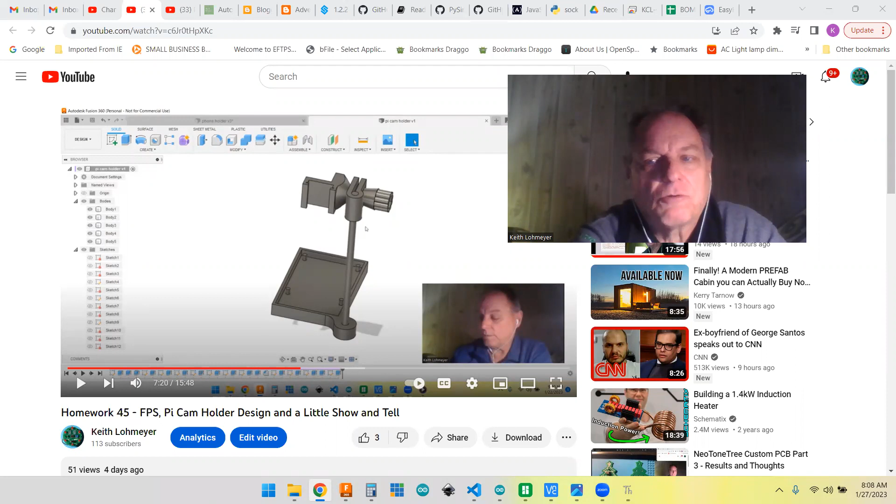Hi. While doing the homework for Paul McWhorter's Raspberry Pi class number 45, one of the homework things was, if we're also taking the Fusion 360 3D printing classes, to show off our design if we made one for the Pi cam holder. And I gave a quick look at what I did on my homework video about getting the Pi cam set up.

But one of the other students taking this left a comment down here. Andrew said, "Really cool. Could you make a video on more of the design?" So for Andrew, here's how I went about creating this design and the thought processes included in it.

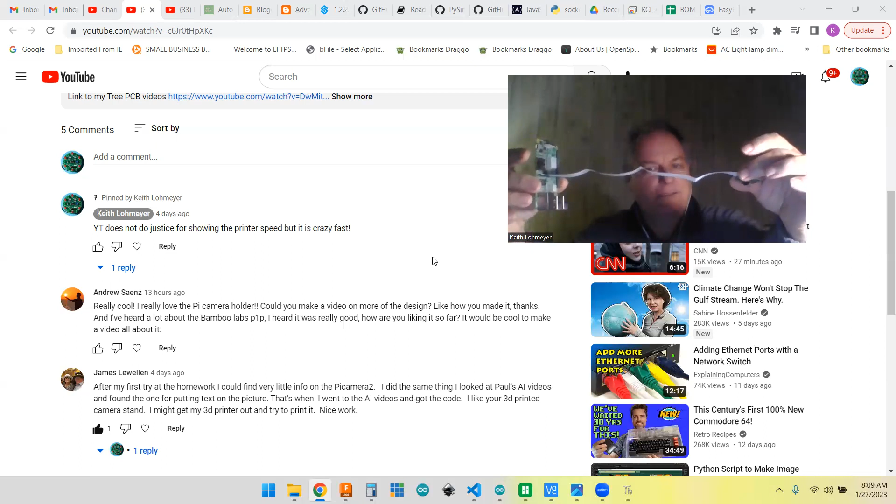When Paul first asked, I said, well, that wouldn't be too bad. Just make a round base and put a holder at the top of it. And I wasn't even thinking about making it integral with the Raspberry Pi. But you've got this cable that is only about a foot long, so you can put your camera maybe 10 inches above the Pi, and the Pi has to stay there with this ribbon cable. You're not going to go too far with it. You don't want to stretch it.

That's when it hit me: you've got to have a base, so why not make the base with the Raspberry Pi sit in it? You can see here, that's what I got. And one of the things I like to say, I love 3D printing, but 3D printing isn't for everything. For this vertical rod, I originally thought about using a 1/4 inch wooden dowel rod, but I didn't have any dowel, but I had a piece of 1/4 inch steel rod in my shop. So I used that.

So, you can 3D print everything, but especially if I would have used dowel rod, you can go buy a foot of dowel rod at Lowe's for, it used to be $1, probably $2 now for a stick of 1/4 inch dowel rod. And maybe you've got it already in your shop.

I also use, for structural parts, like if I make a spool holder for my 3D printer, I'm not going to go to all the trouble of 3D printing the part that holds the spool. I'm going to use PVC pipe. It's stronger. It's cheap. You can buy a 10-foot length of 3/4 pipe for a couple dollars, probably $5 now. And you only need a 6-inch piece of it.

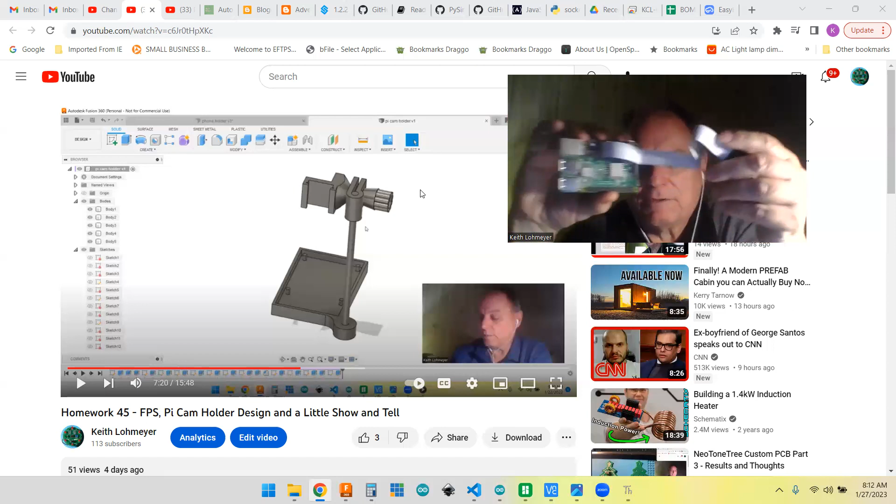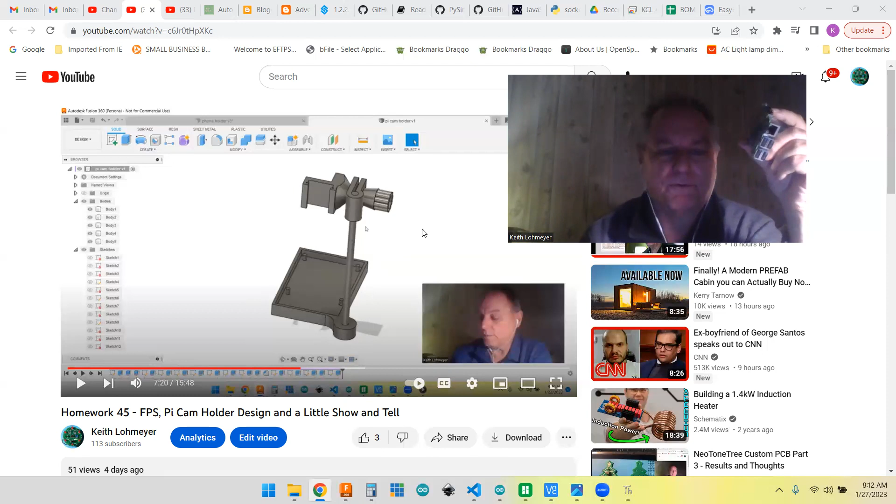When I was looking at the Pi, I said, I don't want to block the ports on it. So that's when I decided to set it off to the side, offset. And when you're setting the Pi in, your headers will be here, so we have that T connector, and usually you would have to put the breadboard out here. So I can spin this around and it'll be facing that way for the breadboard if I ever want to capture the breadboard in my videos. So that's what I was thinking.

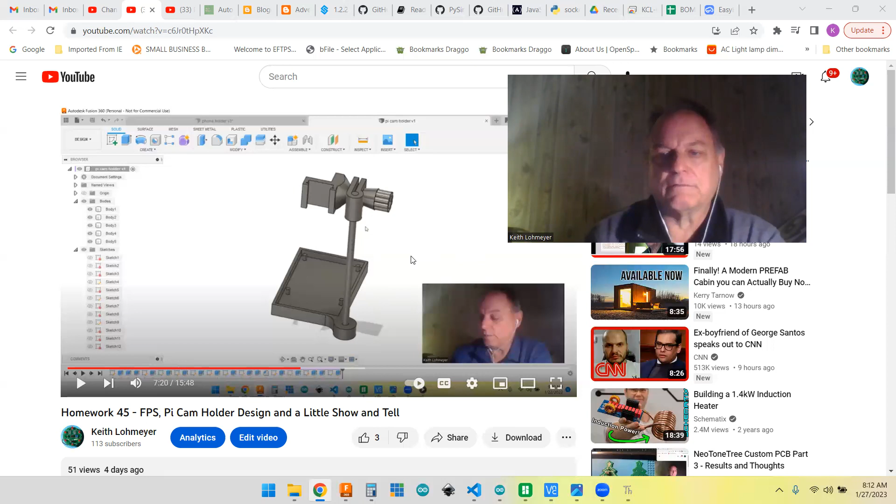And I knew that this was only going to be 8-10 inches high. I forget exactly what I made it, but let's go over the CAD for that in Fusion. Get myself out of the way a little bit. So there's the holder. I'm not going to redraw this, I'm just going to go back to the beginning. You can always do this, you can edit your sketch.

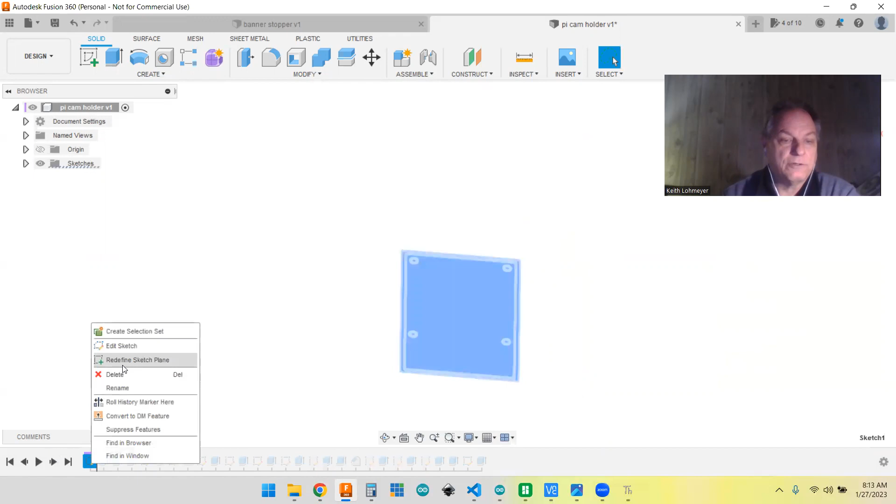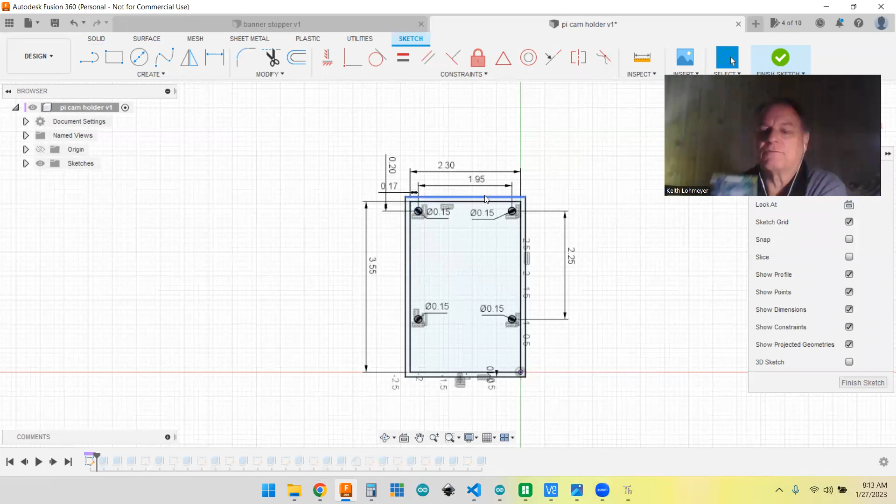The first thing I did, I got the outline using my handy calipers. I probably could have gone online and got the dimensions of the Pi. I decided that I was just going to make a tray, and I put standoffs because there are some components on the back side of the Pi, and you don't really want it to sit on that.

So they have the 4 standoffs on here, in here, here, and on the top same way. So I just put standoffs in there and did that. So I measured this line here, as you can see the dimensions for the Pi itself, and I always give a 10 thousandths or so clearance when I measure. 345, I'll just add 10 thousandths to it just for clearance on almost all parts that I create. And then you can see 230, so it's probably 220 on that.

And like I said, I use imperial units, so in America here, that's what we do. Then you had your 4 standoffs that you wanted to be on those bolt holes. So the way I design that or think about that is, okay, I want to get one that's in a corner and I want to measure to where it is. So that's what I do first.

I put one here, and I knew that it was 200 thousandths to the center, just eyeballing the calipers. You really can't measure the center of the circle without doing a lot of math. So I just eyeballed it, and it was about 200 thousandths and about 170 thousandths from this edge of the board. So I placed that one, and then I did the same process and measured the distance in between these two, and just came up with that 195 and placed that one,

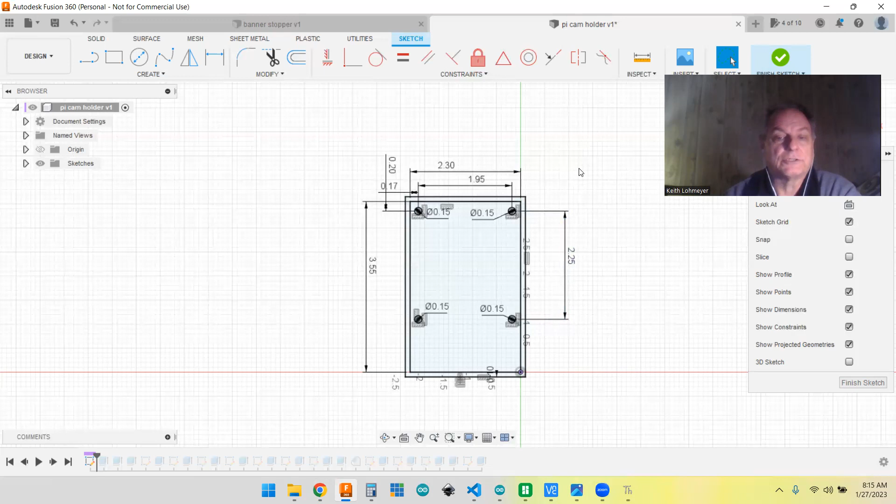and then went down to this one and got the 225, and then I think I just did horizontal vertical on these to get them exactly right. Same way here, horizontal vertical to get them right, so that they're all on the same line. But basically that's all I did for that.

And then you use your offset, and here like I said again, I just offset it 100 thousandths, 0.1 inches. That seems to be a good thing to use for uprights that aren't going to be too flimsy but not too beefy. So also the Raspberry Pi, I found that the connectors are so close to the board that you really can't recess the board down too far. So we'll see when we do the extrusion, but these are probably 50 thousandths less extruded than the sides.

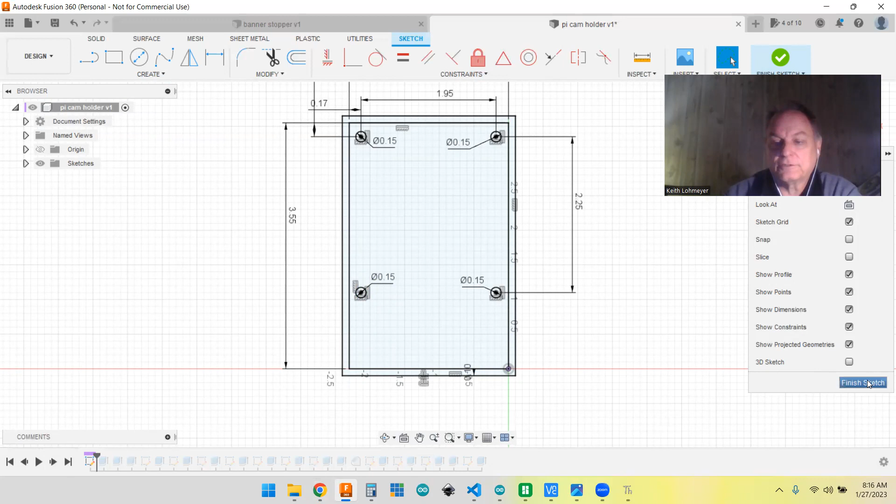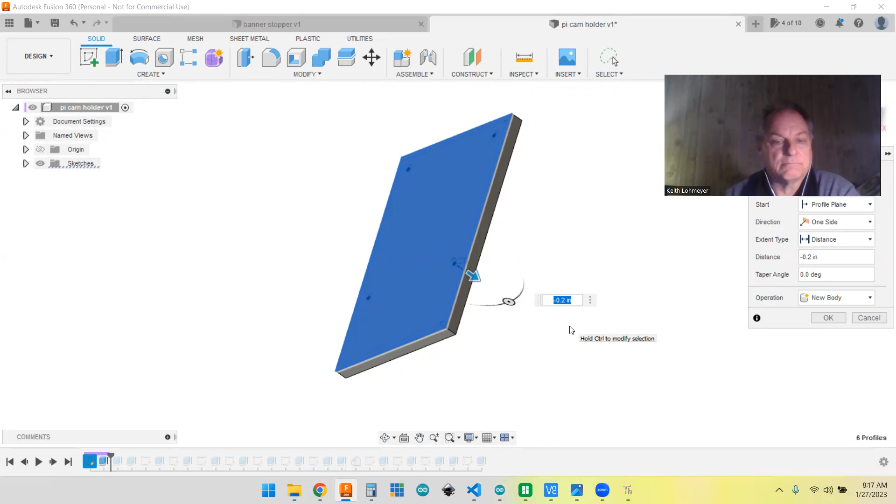So let's go ahead and finish the sketch, go to the next one. All right, so the first thing I did, I extruded this, and I extruded it down. Some people don't like to do this because this is the origin plane, but it really doesn't matter. When you 3D print it, it's fine. So I did make the base 200 thousandths thick just to give it some beefiness.

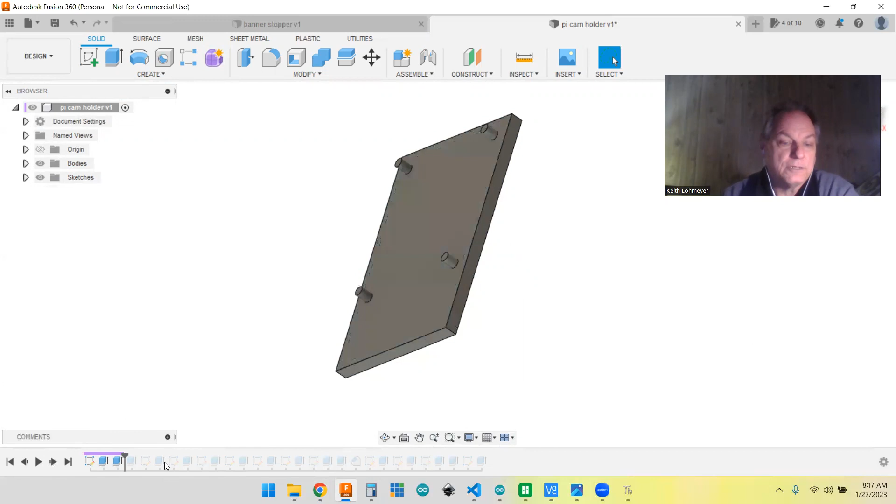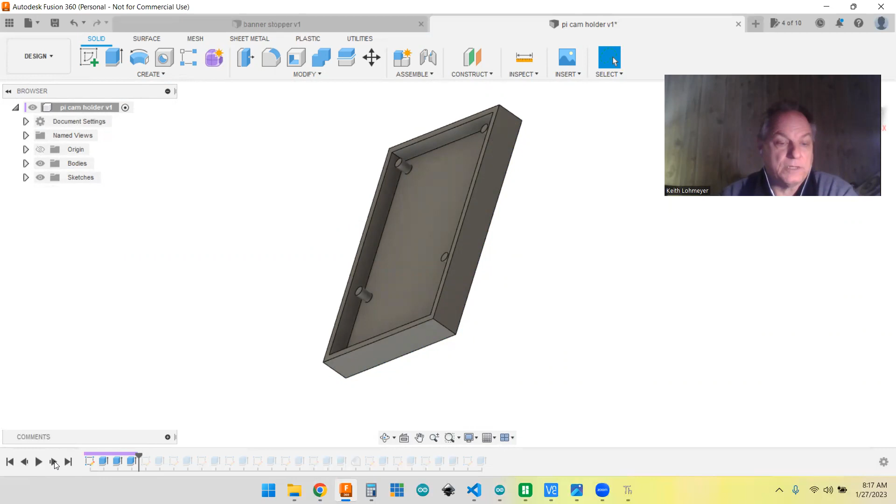And then the next one, I brought these up. Let's see, I'm pretty sure they came up 200 thousandths. Okay. And next would be the sides, I guess. And I brought them up 250 thousandths. So yep, the sides are just 50 thousandths higher. And then let's see, then I sketched.

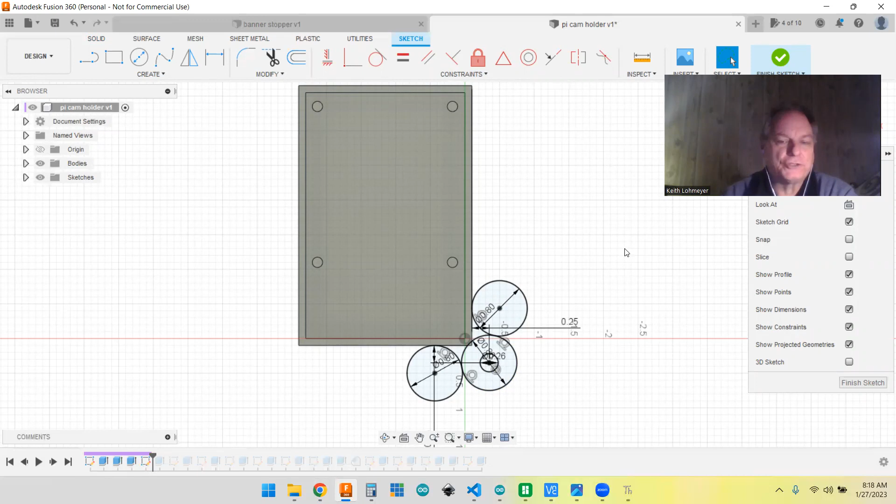All right, so now I decided to put that side on. I don't do things as clean as Paul likes to do them, but all I need to do is make sure I visualize it. So this is where the rod's going to fit. And like I said, it's a 1/4 inch rod, and I knew my rods were exactly 0.25. So with my 3D printer, at least, if I give 10 thousandths, it gives a nice snug fit. It can be pulled out, but it's not easy and it's not sloppy. The rod will stand up good in that. So that's where the hole's going to be.

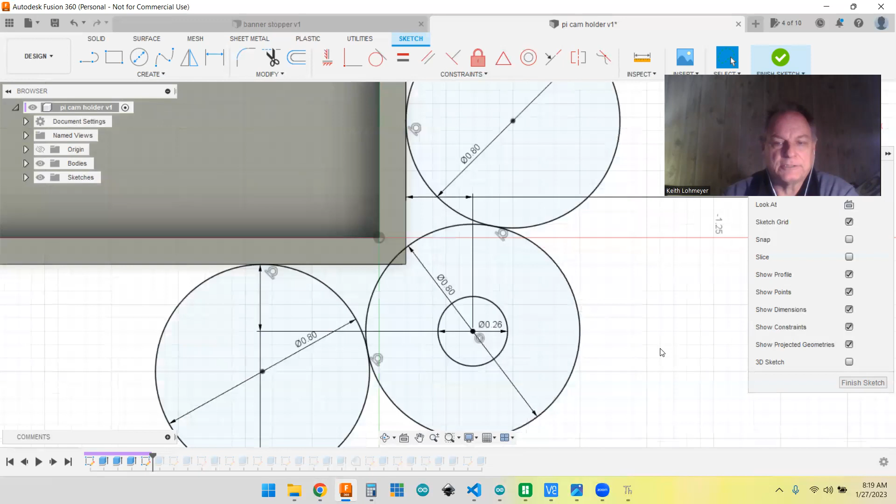And then I just kind of decided to make something that looked about right with the 800 thousandths, a little over 3/4 of an inch diameter for that. I could have just put sides straight out to that, but I like a little bit of aesthetics in my design. So I just created 2 more circles and did the tangents up against here and up against the other circle. And that way you end up with a nice thing.

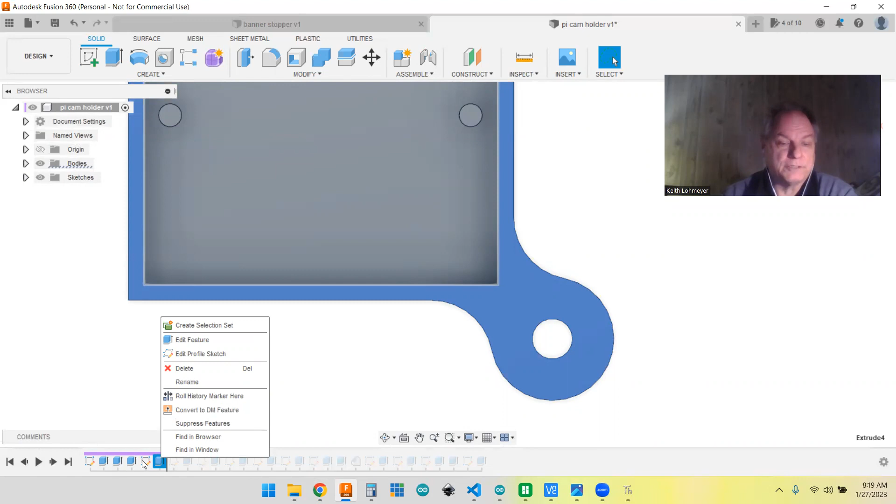Now, Paul, he would have gone through and trimmed all these away, but you really don't need to do that. And that's what it looks like. Oh yeah, one thing I did want to point out on this sketch. Let's go back to the sketch. So the sketch plane was the top of this. I like to build my sketches just the way I envision it being on the thing.

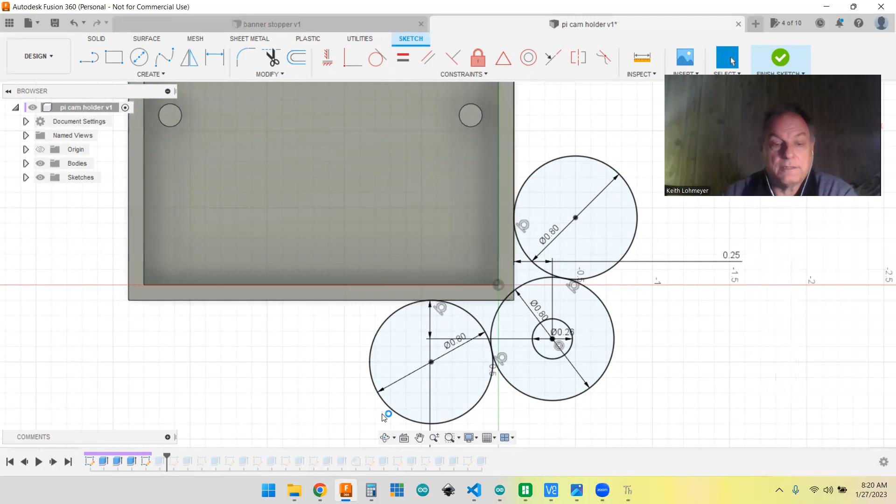You could have started on the bottom. You could have built it from the bottom, but I always look down on stuff. So I just said, where you want to start your sketch plane, it's going to be on this top layer here. And then when you go and do the extrusion, you just extrude it down. I'm not going to show that, but I just extrude it all the way to the bottom.

So if you remember, we started here at the plane and went down 200, and then we came up 250. So this is actually about 450 thousandths, or just under a 1/2 inch high. So when your rod sits in there, it's got plenty of beef where it's not going to tilt side to side too easy, especially if you got a nice tight fit.

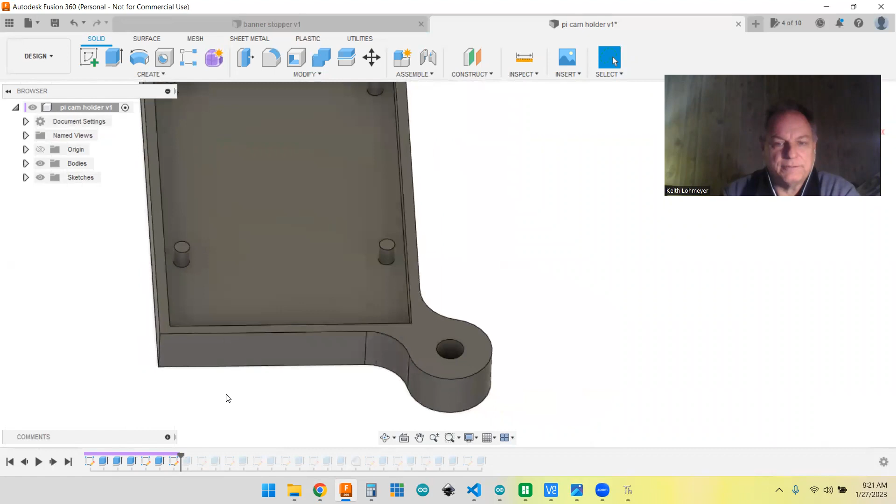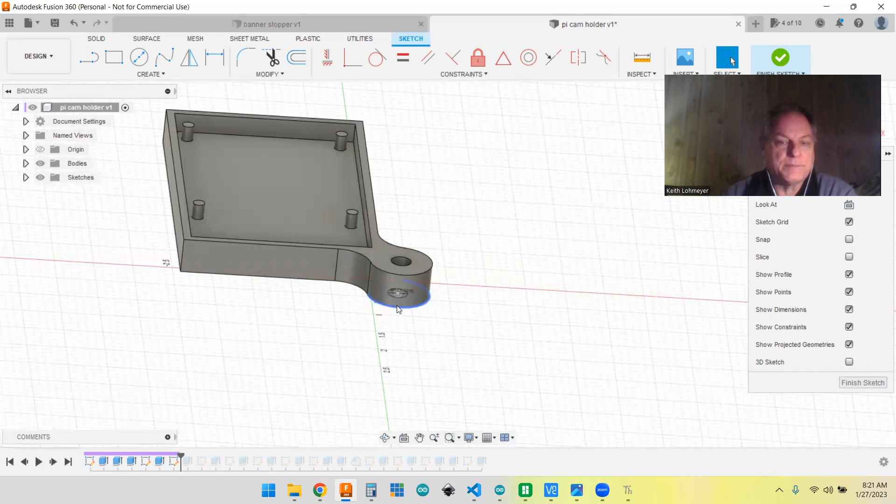What did I do next? I don't even know what this is for. Let's edit this sketch. Oh, okay. So if you notice, that sketch is actually on the bottom. So I wanted to go ahead and put in the rod that I wanted to do for the demonstration. So I started my sketch on the bottom plane because that's where I wanted the bottom of this thing, which is below this plane. You can see.

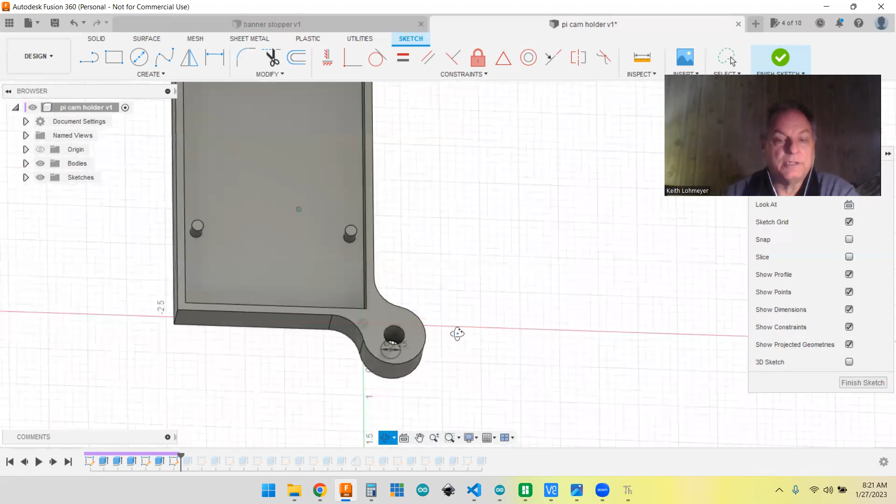Well, actually, that's where your plane started. So I said I wanted to start my design, my sketch on this plane here, and that's where it came up. And like I said, I wanted to design that rod, so I just made that 250. You pick up the center of the circle and you just make a 250. That's the only thing that was on that sketch, was that rod. And then you go to the next one and you extrude it out. And you just extrude that rod out 8 or 10 inches or however long I did it.

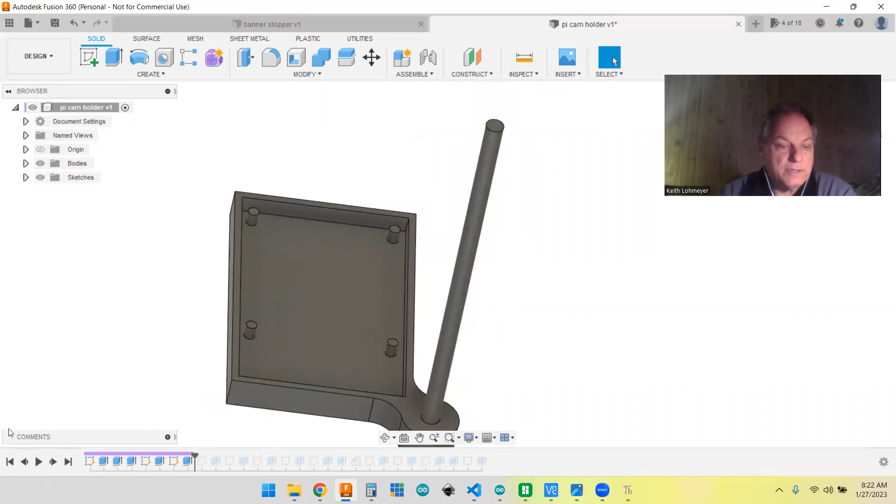And then you go to your next one and you start this sketch, because this is where I start on the top, and you can start your sketch on the top of that. So I'm going to edit that sketch. And you can see that part, I just said, where do you want to start your sketch? I said, I want to start on the top of that.

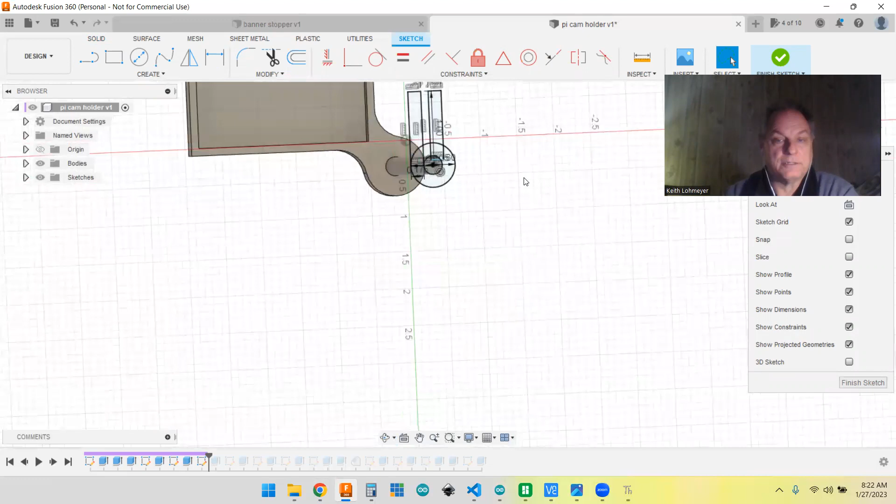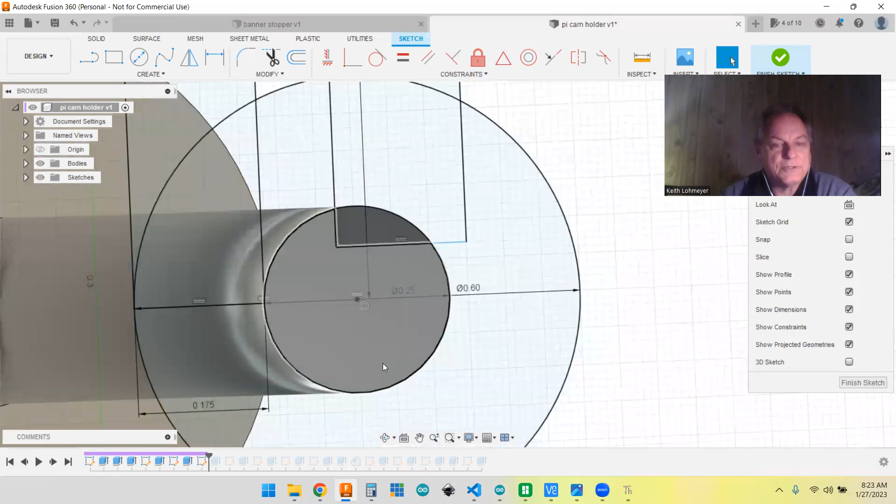And then you say, I already had my 250 for that, but I knew that I wanted the 260. Actually, I might have made that 250, but it wouldn't matter. Normally I would have made that 260, but it looks like I made it 250, which I noticed was a little tight going on, but it's still nice and snug. I might have done that because I didn't want it to be too loose. So maybe that was a conscious decision.

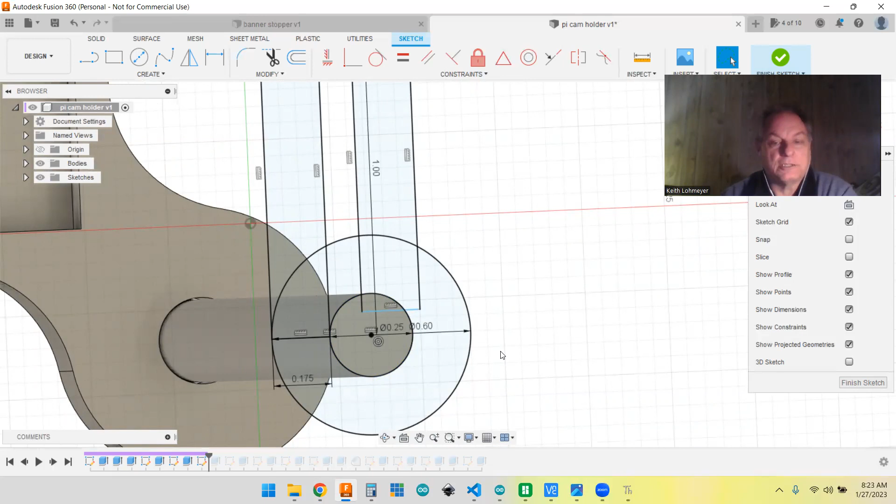I can't remember. But then I just decided to make this circle about 600 thousandths, almost 5/8 of an inch. And then I knew that I needed these things out here, just a couple rectangles. I just made those rectangles so that they would be there. I didn't even fully define this one because it really didn't have to be, as long as it was inside this one when you go to extrude it.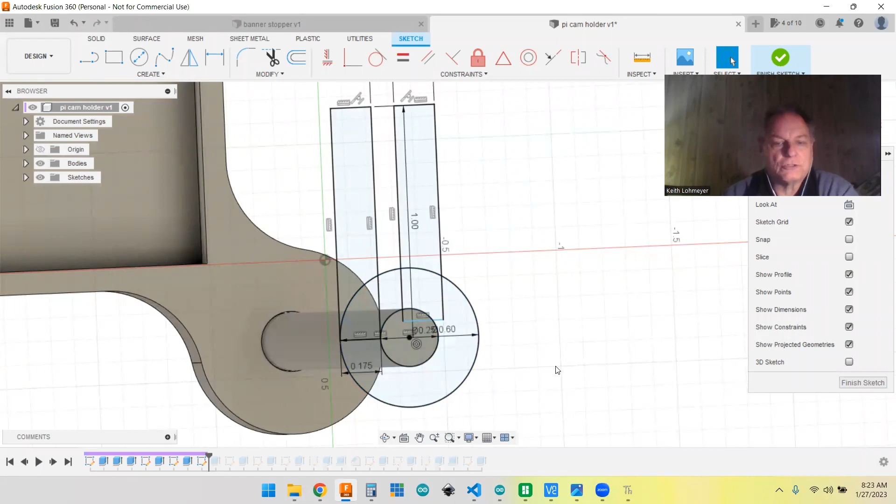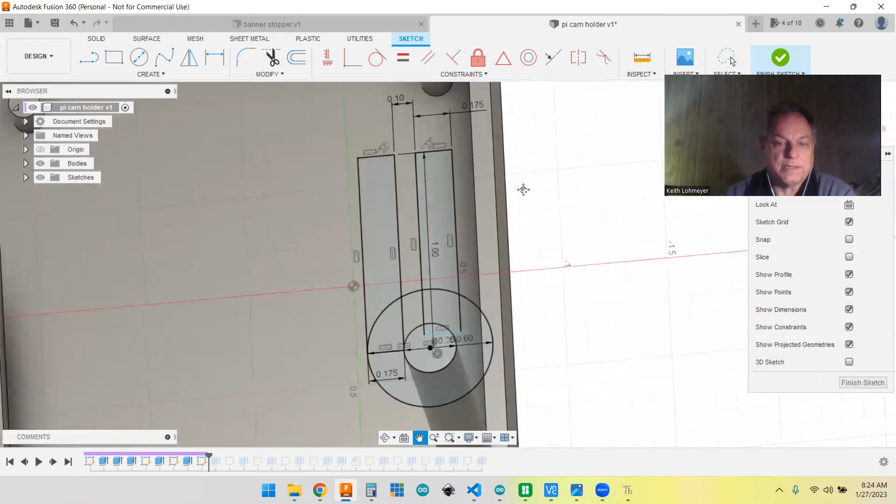But you can see the important things. I got the thickness of this and the thickness of this. I think I made these equal or something. I don't see a dimension on them. Oh, there it is. It's down there. Having a heck of a time here. There we go. So there's my dimension down there, and I put the other dimension up there. Usually I try to keep them together, and then I have 10 thousandths in between it, so you got room to squish that when you're done. You say, well, that doesn't look like much, but it's enough to give you your extrusion. So we'll go to the next one.

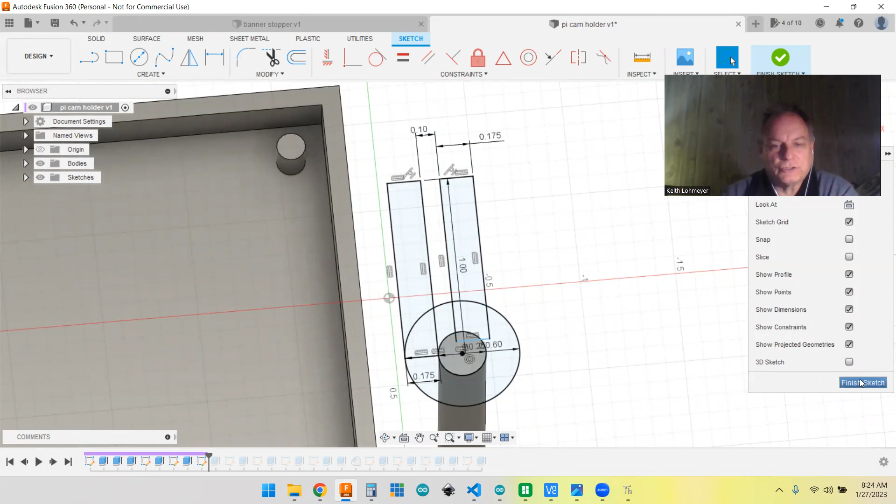So there's my extrusion. And if we go ahead and edit that, that'll bring back up all your sketches. So you just pick the parts you want. And like I said, you just don't pick that section when you do it, and everything's good, and extrude it down. So you have to watch: whichever way this arrow is going is the positive direction. So when I started, it was facing up, so I knew I had to go with a negative number there.

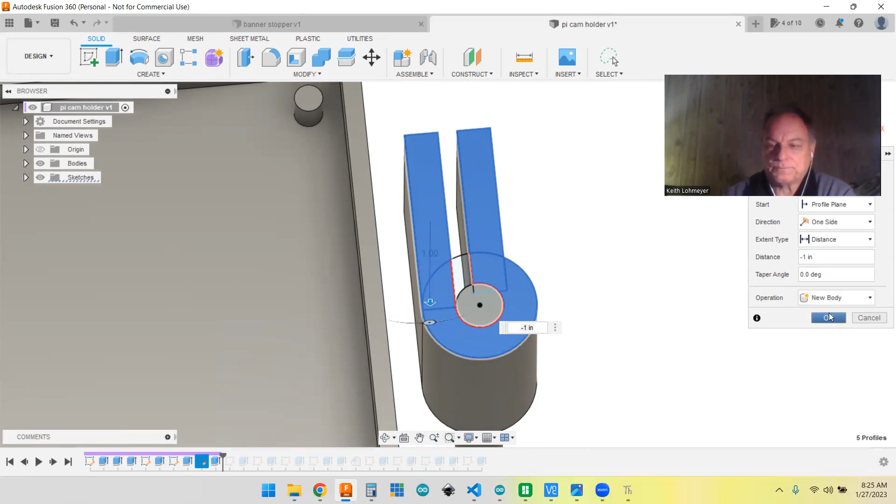And then, like I said, each one of these pieces is going to be a separate part. You got to say new body, not join. When I was making this, you would say join, but with this, it's a new body each time. So that's the extrusion there, so we're okay. Next, I think I put the hole in that.

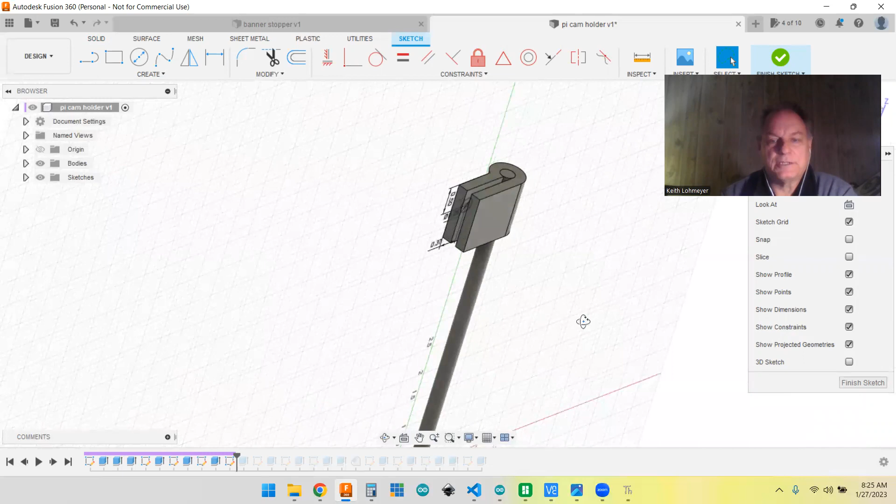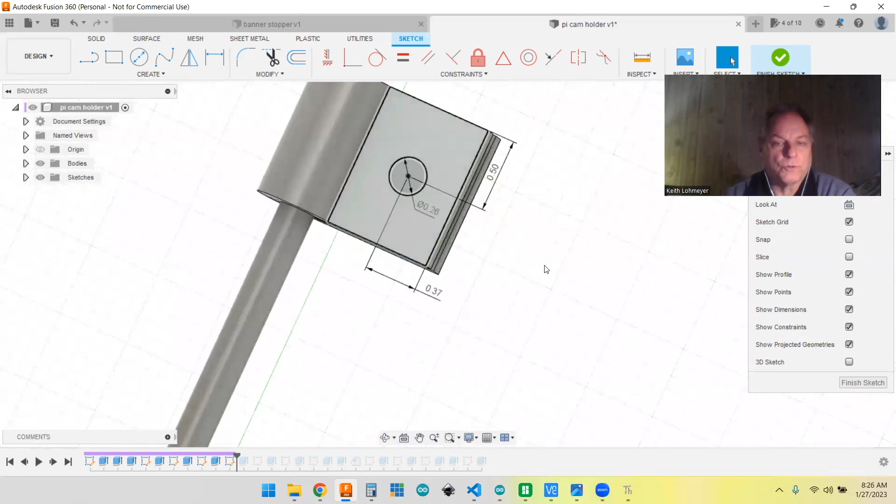So yeah. So what I did is, it's actually on this side. I started a new sketch. It says, where do you want to draw this sketch? So I already had this extrusion. This is where I wanted to start my sketch, because this is where I want to put my hole. So all I did was put a 260 thousandths clearance hole there, because I knew I was going to use a 1/4 inch bolt for this. And then we just extrude it all the way through. Then we start our sketch for the next part. Well, I'm not sure what that is. Oh, okay.

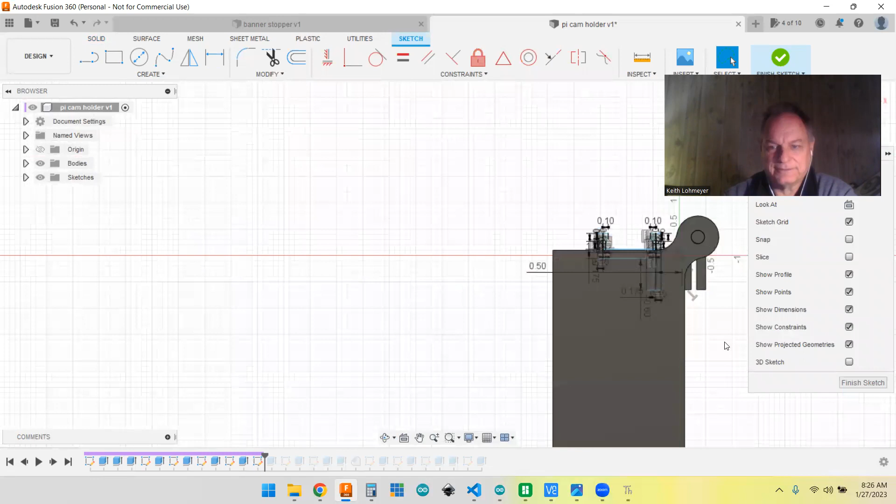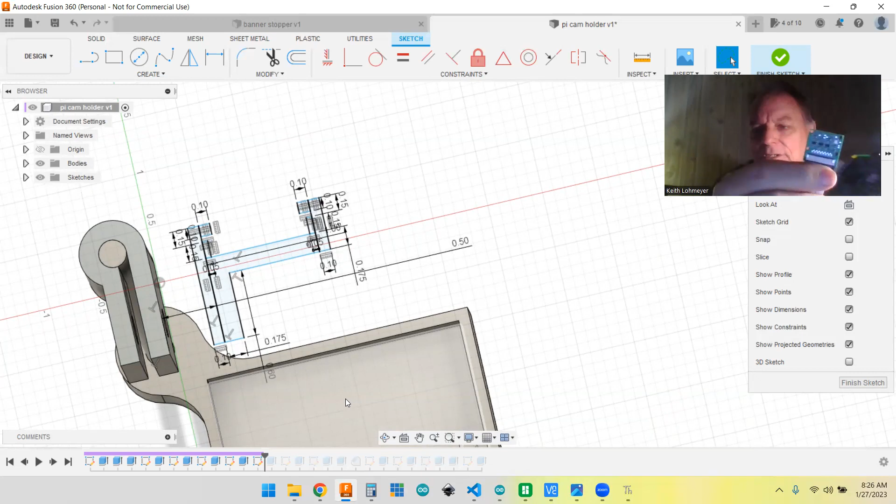It is a little confusing sketch here, but that has to do with the camera holder part. I don't know how you're going to see this, but the camera, you got all these parts - this is the front side, the back side of the camera. You can see how close those components are to it.

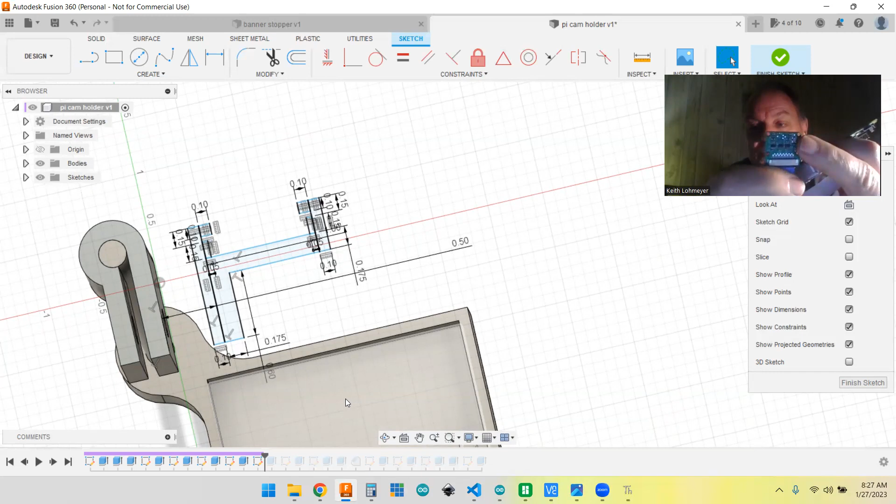So I use my calipers, and they're like 50 thousandths clearance on the edge of the boards here - that's all you have before the components start. But you got components on the backside of that board, so you couldn't make it flat. So you had to just give a little clearance.

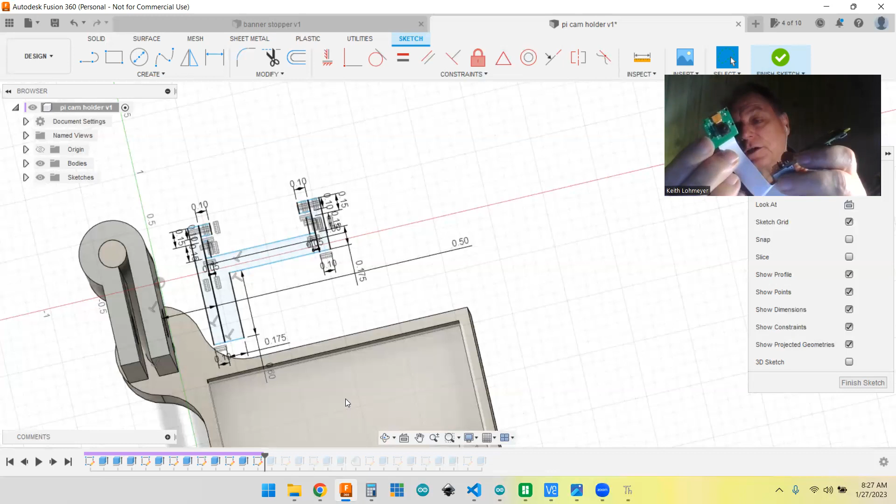And then on the front side of the camera, you still got capacitors or something, some components soldered on the board, but they're a little bit farther in. So I was able to give 100 thousandths on that.

So like I say, this sketch has a lot of constraints and everything else on it. But if you see it, you got all these just a bunch of rectangles basically. And I don't even have the connector in here - I do that on a different sketch, but this is just a sketch. I knew I just wanted an L-shaped frame.

And I knew what my dimensions were for the outside of the camera. So that's what this dimension here is, I think. I added these little - well, I probably did these first - so I put these rectangles in.

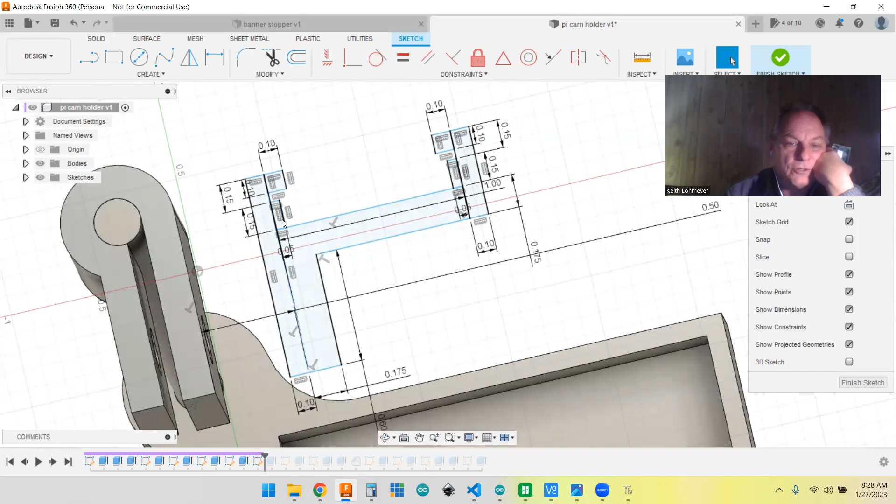They are only 50 thousandths wide, and I just set them out 150 thousandths. I didn't mirror this - I think I probably could have used mirror, but I didn't use that on that. So I just drew each one separately, but they're the exact same thing. And then I knew that...

I wanted this to be 100 thousandths. It looks like it's 100 thousandths by 100 thousandths. And then I didn't even draw - a lot of times I'll put the part that I'm trying to do, like I would put a rectangle there for the slot just to make sure that it's right. But I was pretty confident of my dimensions on that, so I didn't do that.

But it's just a lot of different rectangles. Like I said, it is L shape. I think I started out with an L shaped design, and I just added a bunch of rectangles on the outside of it just to make it work.

So this is the space where your components on the back are going to be, and then this is where the thing's going to be slid in, and the camera's going to be facing out. So you just got to think of what you're doing and do that.

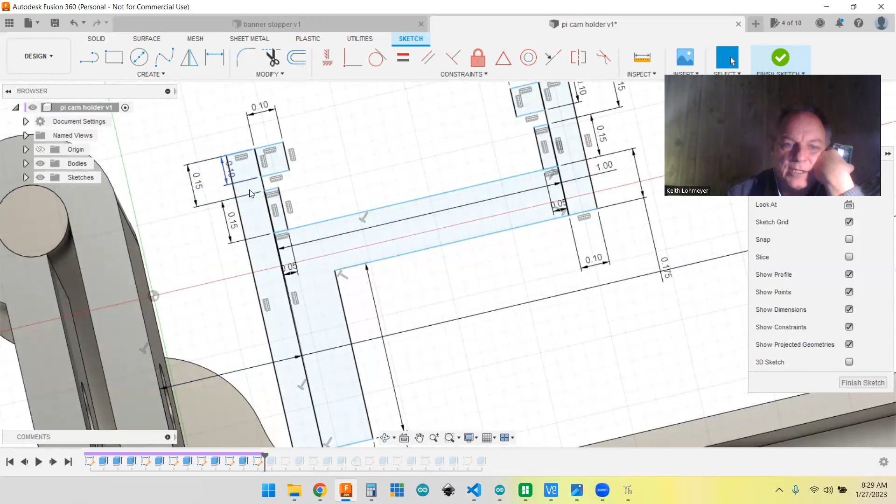Like I said, I think it would have been helpful for me to start a rectangle with the size of the board there. And I knew the board was about 40 thousandths thick, so I wanted it to be a little bit loose in there so you could slide it in and out. So it had 100 thousandths and then 150 thousandths - that's 50 thousandths there. So anyhow, that's what I did there.

This video is getting longer than I wanted it to be, but I figure I might as well give the whole spiel. So that's what that looks like, the camera holder.

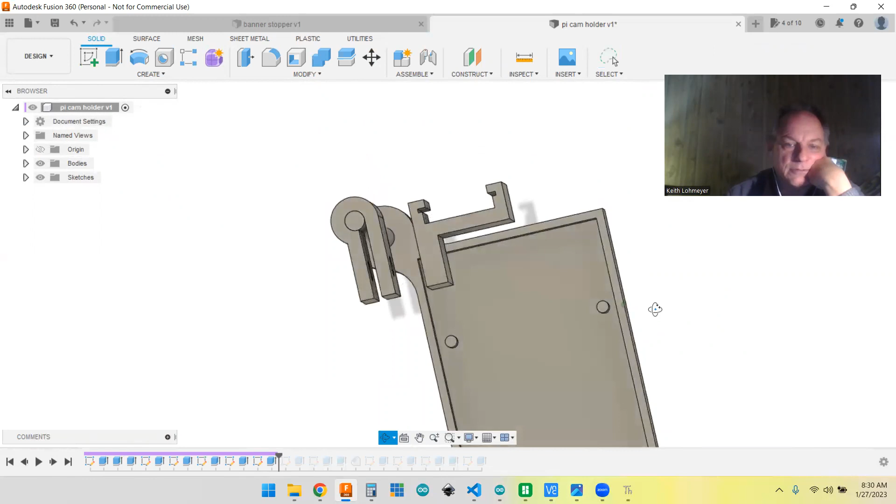So if you notice, right now there's no bottom in that slot. So I can't remember, is that the next thing I did on the design? Probably put the bottom rectangles. Yeah, I just filled in these rectangles at the bottom and then extruded it.

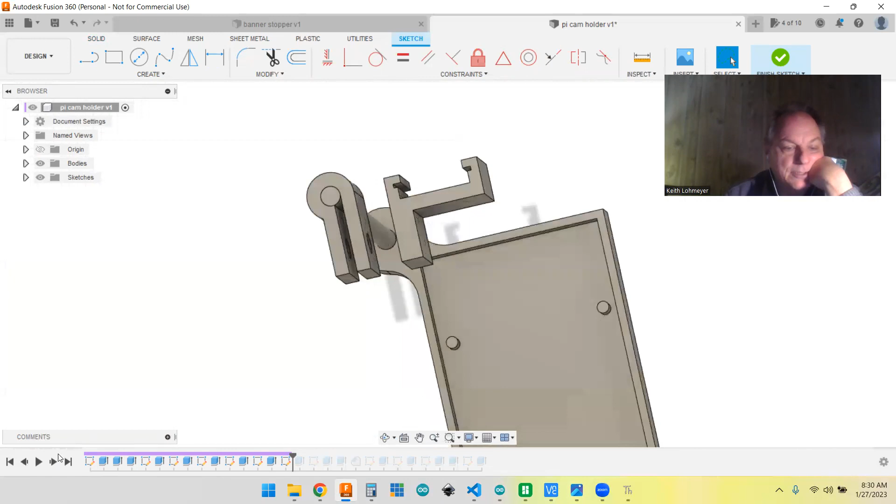Now you see that little thing up there, and the next one is a sketch. I'm pretty sure that would be this connection sketch here. So let's see what I did for that.

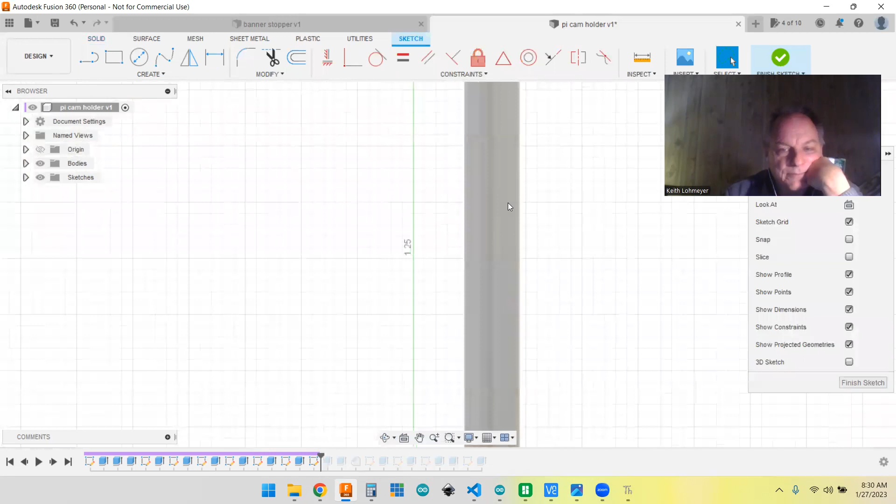And this is where, when you get to this point, you probably wanted to start turning off things, so you can turn off your bodies up here. Let's turn off 2 and 3. So now you see this is where I wanted to sketch.

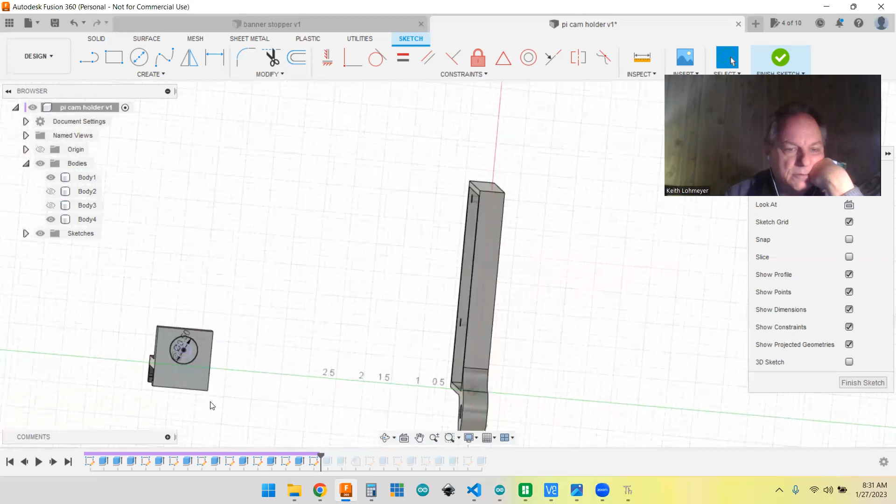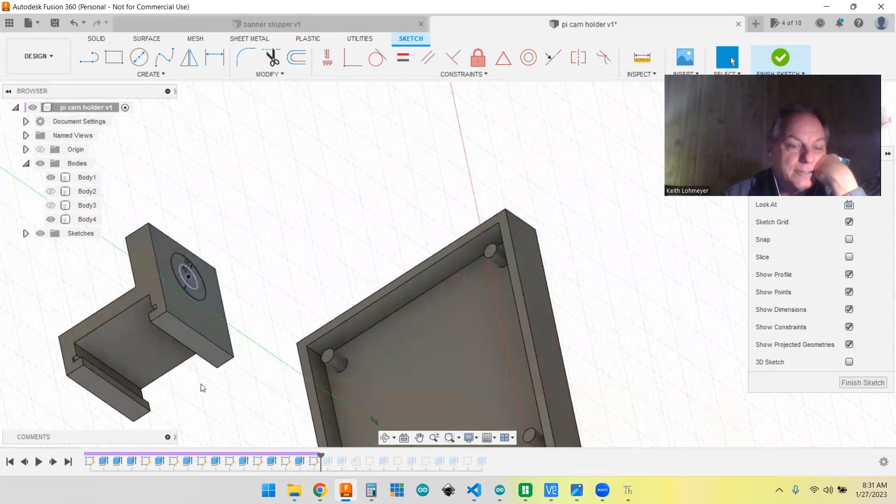I did this a little different way than you might think, but I did a 260 and then I just did a 500. I really wasn't sure how I was going to do this, but then I more thought about it - well, I need to 3D print it sitting on the base here, sitting on the bottom. This is where it's going to be 3D printed from. So therefore, I didn't want to have supports and everything, so all your overhang is going to have to be taken care of.

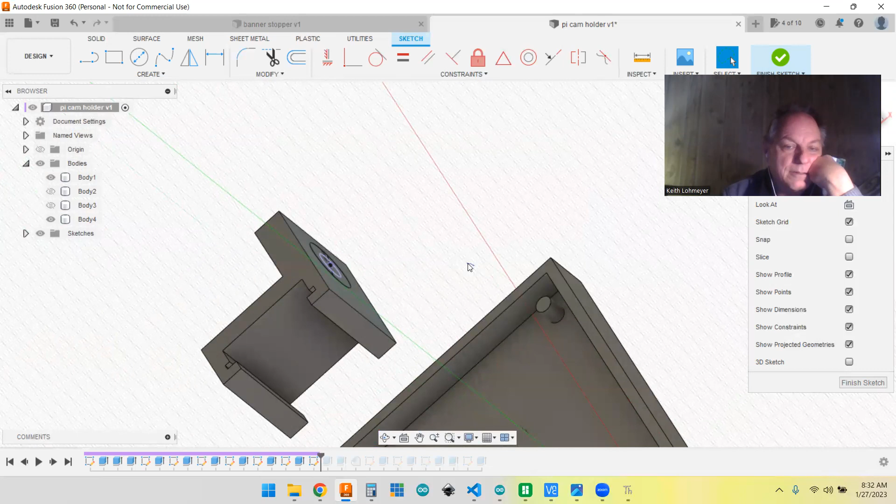Anyhow, you got that - like I said, you had to have your clearance hole, and that made 500 thousandths just because. And then I went ahead and extruded it. I extruded the hole through the part, and then I extruded this up.

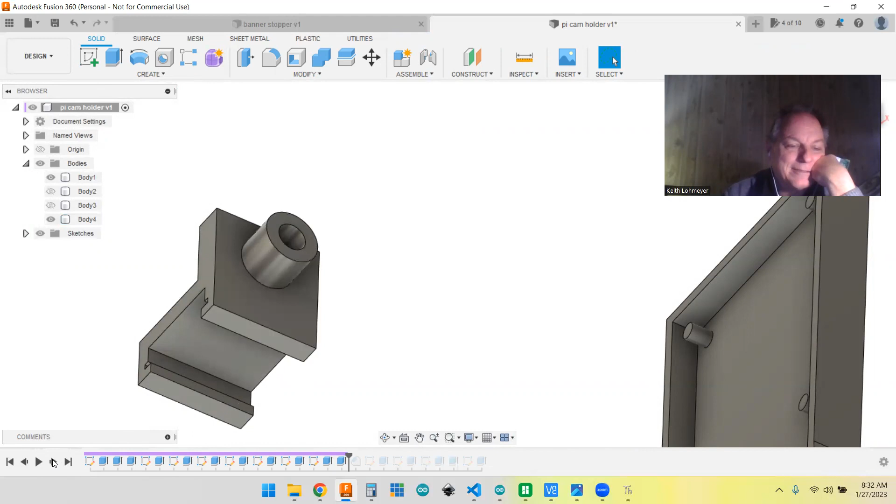But I said, well, if I print it from here, that's gonna be an overhang, and I'd have to either support it or something. So I said, oh, let's just put a 45-degree chamfer all the way around that. And it actually turned out to be printable because it's 45 degrees. Everything worked out like that. So I said, that's good. Sometimes, like I say, if you've got 45 degrees, you're fine. You don't need to worry about much else.

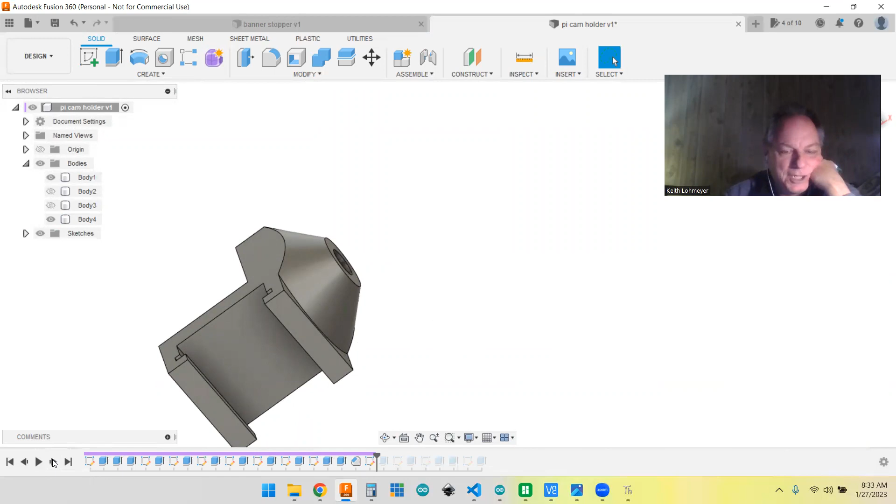And I don't even know, oh, this sketch here, yeah. So now I wanted to put a hex bolt in there, so I had to create the hex. Did that on that side and got lucky because I didn't put that bolt hole exactly where I wanted it. And it just worked out that it worked right up to that.

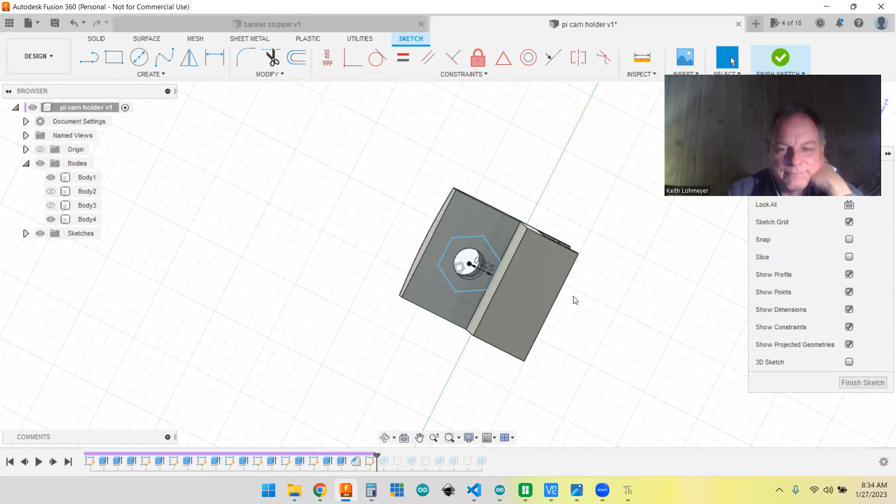So a 1/4 inch bolt in America, you use a 7/16 wrench on it. When machinists talk in America, they talk about thousandths. So a 7/16 wrench is 437.5 thousandths. If you ask a machinist what the decimal part of 7/16 is, they'd say 437.5.

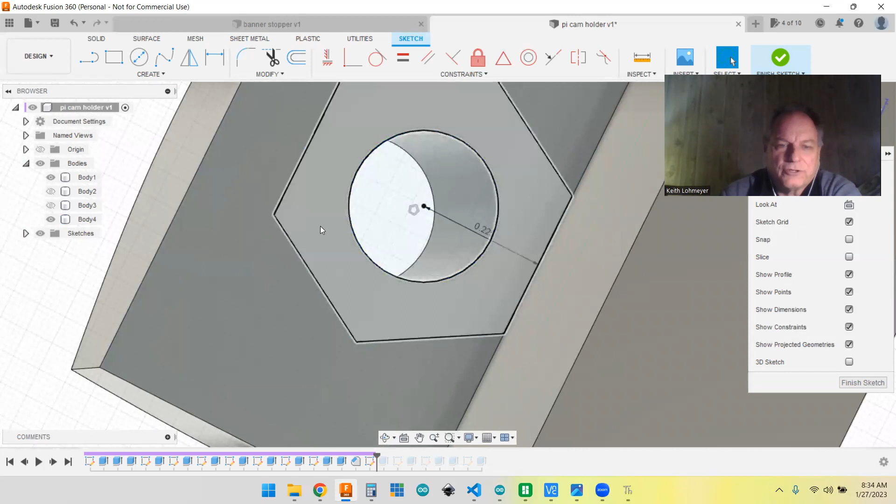That's the exact dimension, but of course you want to make it a little bit bigger. So when you're making a polygon, you're doing the radius, so you've got to cut it in half. So I got 225, and if you double that, that's 450. So I went from 437.5 to 450. That gives you plenty of clearance. You don't need your head to be that tight, you just need it not to twist in the thing. So that's what we did there.

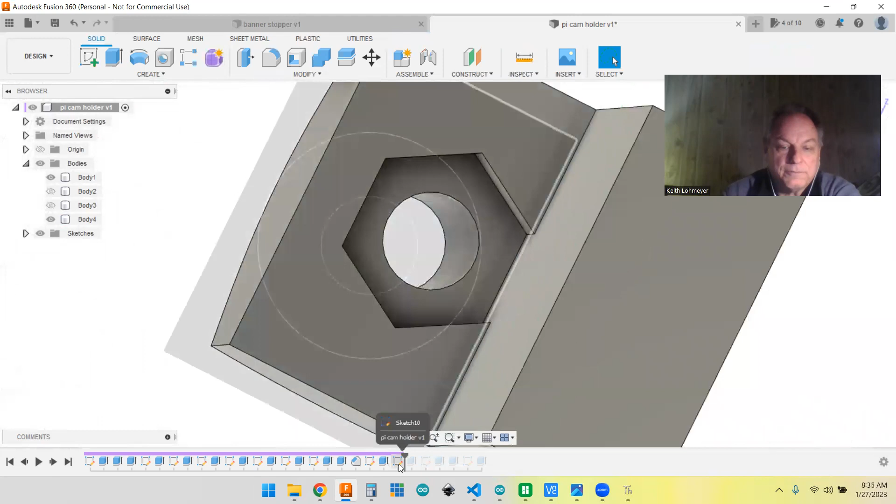And move on to the next one. Then extruded it out, giving us a nice hole there. Oh, what did we sketch next? Okay.

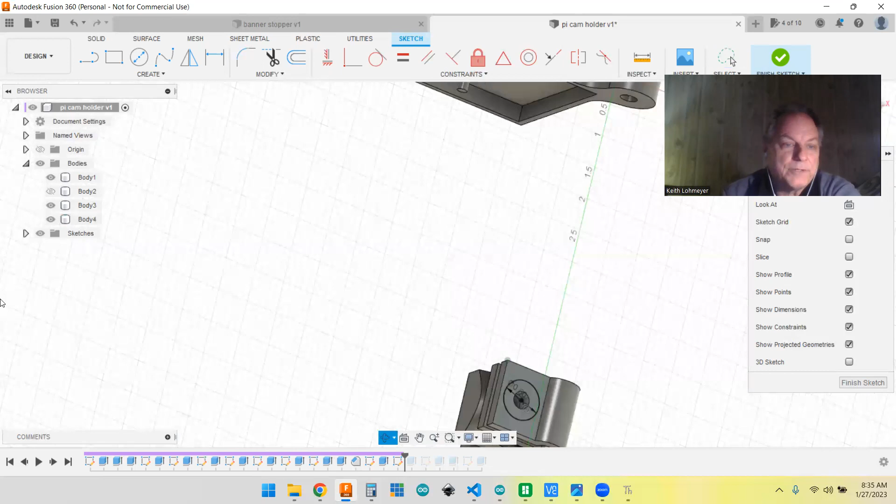I've got to start turning parts back on. Might as well turn them all on for a second. I'm not real great at spinning these items, but I could get better at it and get by. So now we're working on the knob side.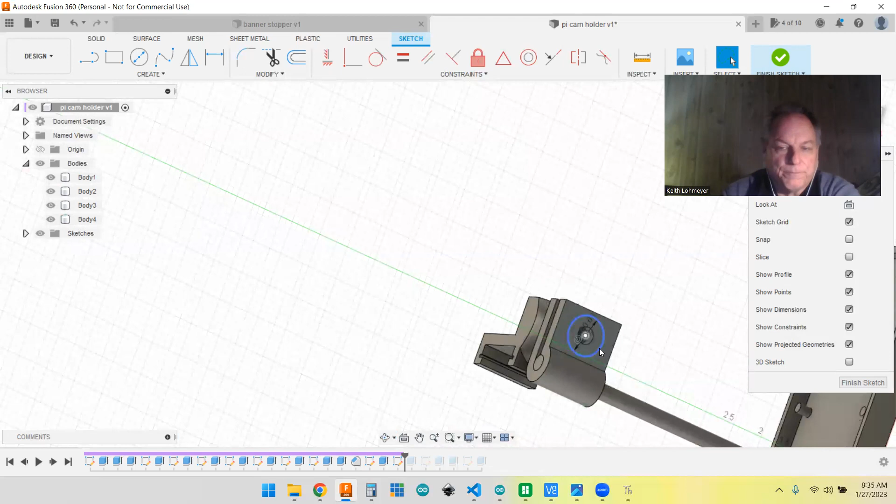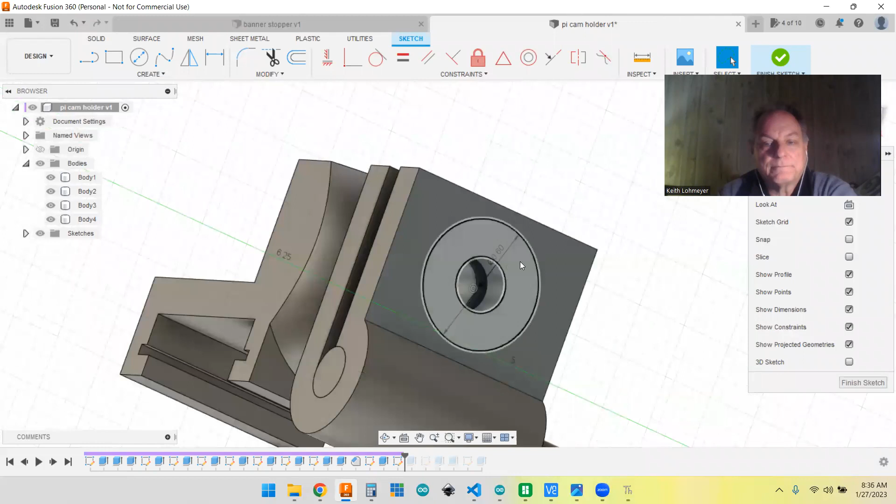Like I said, this was this side. You could call it a new component or a new body when you do this, but the best thing to do is just to draw it, because you already got this hole here. That's the best place to start drawing something. So I started sketching, and the only thing I did is kept the hole here and then just made it a certain diameter.

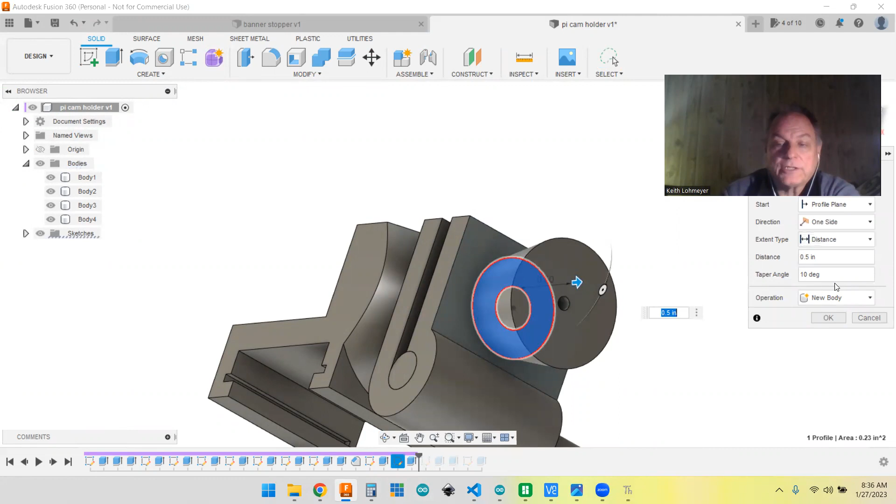I just extruded it, but let's go and edit that. So when you extrude something, you can extrude it and give it a taper angle. So I tapered it out. But if you noticed, I had the hole in there, and my hole also tapered the other way, so the hole ended up being a lot smaller.

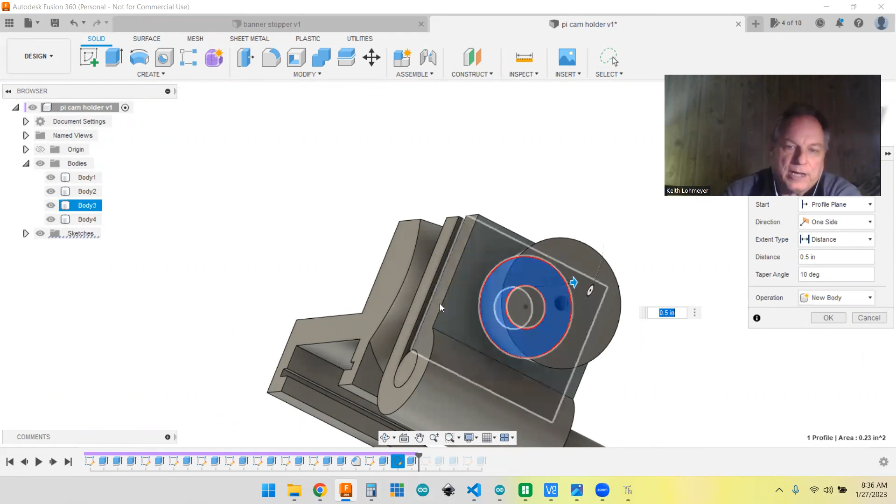So I had to fix that on the next one, but I still wanted that shape, so I used that. And you can see that's a new body, so it's not attached to that. So you say, okay. And the next sketch was to create that hole. I created a new sketch for it, but okay, so I did all this at one time.

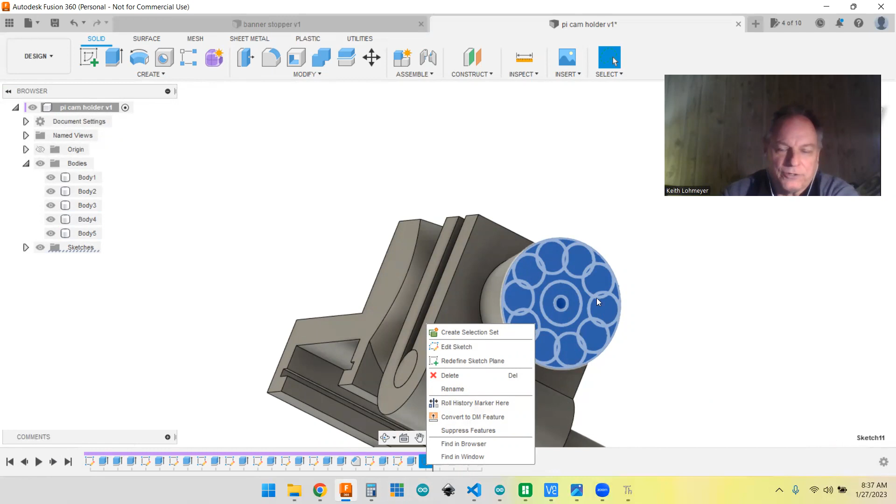I created the knurled part. Instead of making knurls, I decided just to make a circular pattern of circles and have them overlap, but have like a ridge in between them. So this just looked like it was going to be good. And at the same time, I made this center part so that I could extrude that as well.

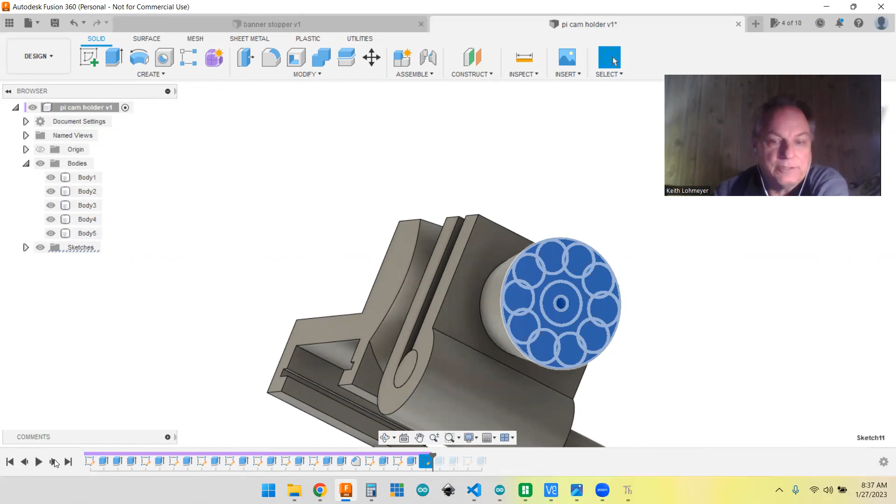So let's go ahead, what did I do here? Oh, first thing I did was extruded the circle back out, which is good. And then I extruded the knobs back out, so then they came out just fine.

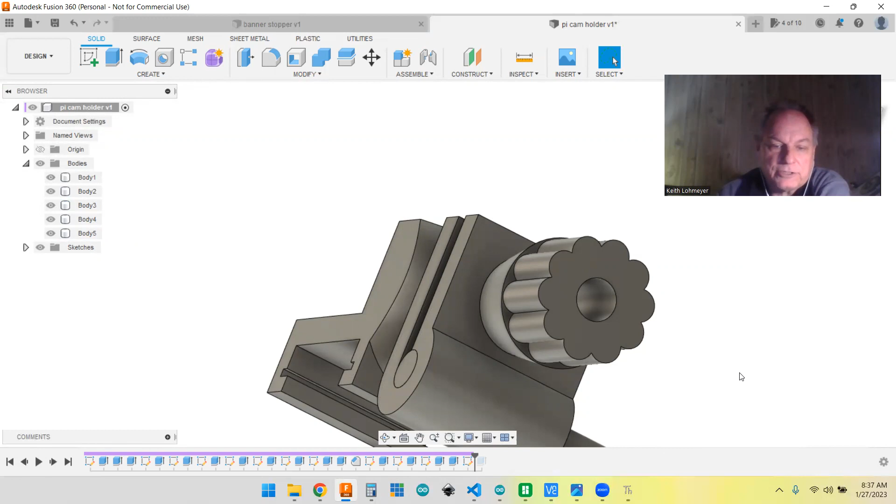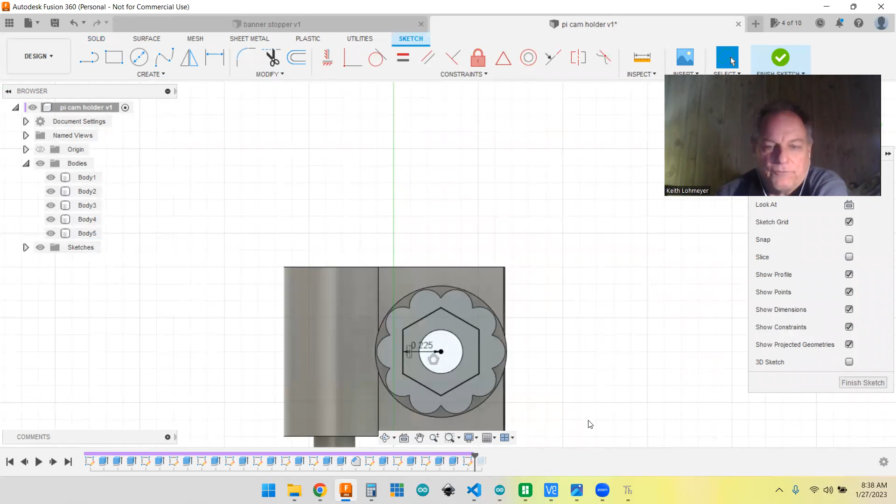Almost done, actually. So the only thing I had to do now was sketch, the nut had to be recessed up into this. I did the same thing, 225 radius from one center to one side of your thing, so it's 450 thousandths again. And then all I did was recess it in there, and that's all there was to it.

My workflow is I like to keep building and make it look like it's going to be in the end. I know you could do this and have all separate parts and everything, and then combine them up and put them together, but why do all that? You just build onto what you got. And if I was drawing it on a piece of paper, that's how I'd do it. So that's why this workflow just works just fine.